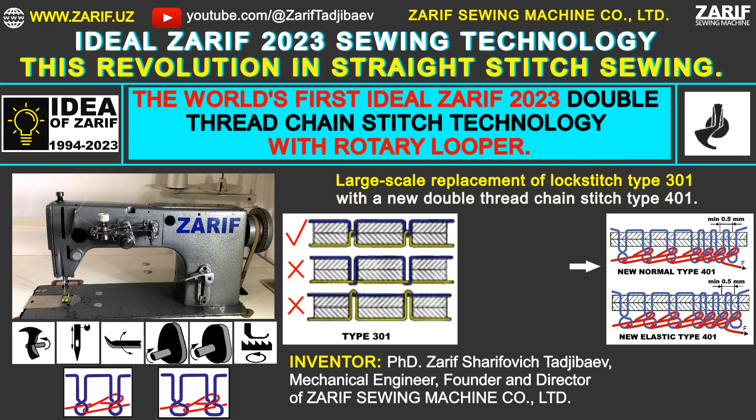We modified an industrial lockstitch sewing machine, Class 1022, Orsha, Belarus, to carry out our initial trials. Through extensive testing, we identified areas for improvement and gradually improved the machine by applying our expertise. Finally, in 2023, we successfully created the world's first Ideal Zarif technology for straight stitch sewing.

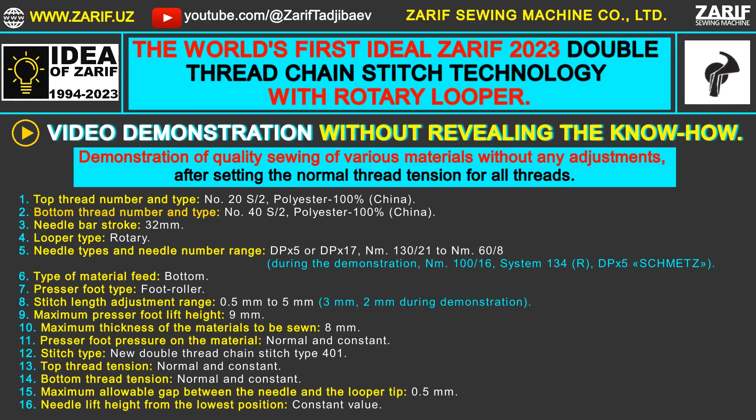Our prototype of the innovative Zarif double thread chain stitch sewing machine works on the basis of our Ideal Zarif 2023 year double thread chain stitch technology with a rotary looper.

For the sewing demonstration, we will be using sewing threads made in China. The main requirement is the absence of knots, as knots disrupt the stitch formation process as they cannot pass through the eye of the needle.

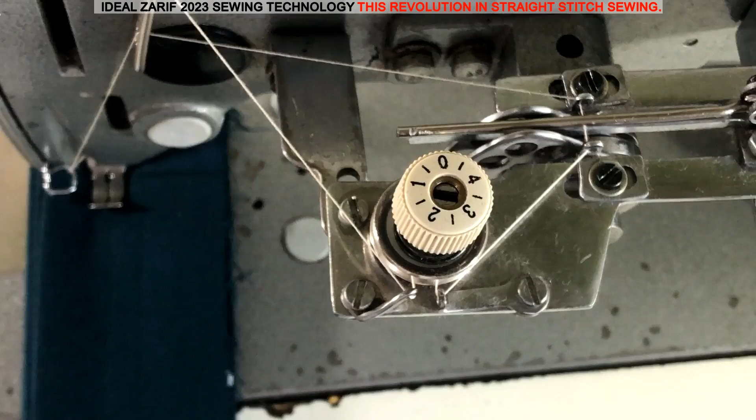During sewing, the top thread tensioner nut and the bottom thread tensioner nut, not shown, remain in a fixed position, ensuring the normal thread tension, neither too loose nor too tight.

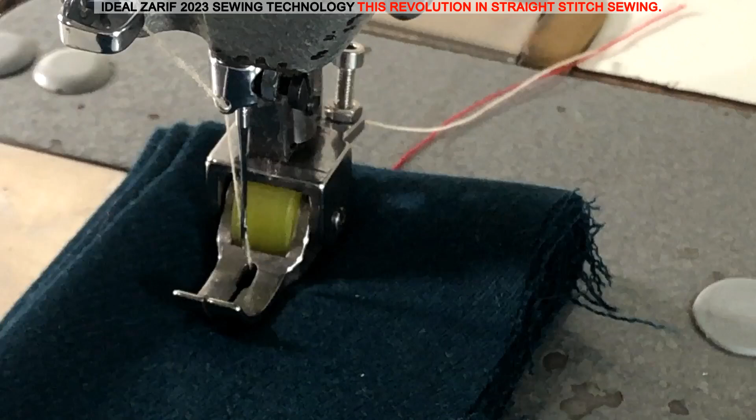In our Ideal Zarif 2023 sewing technology, the needle is not involved in pre-tightening the top thread loop from the previous stitch. As a result, for the first time ever, a double thread chain stitch sewing machine uses a needle with one long groove.

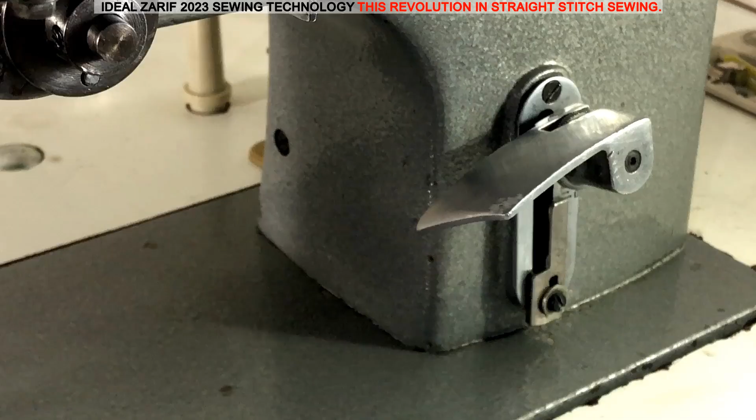This design offers greater resistance to bending compared to the double groove needle used in existing double thread and multi-thread chain stitch technologies. Thanks to our Ideal Zarif 2023 sewing technology, it has become possible for the first time in the world to reduce the length of the double thread chain stitch to 0.5 mm, allowing for more secure tacking of the seam end and preventing unraveling due to condensed stitches.

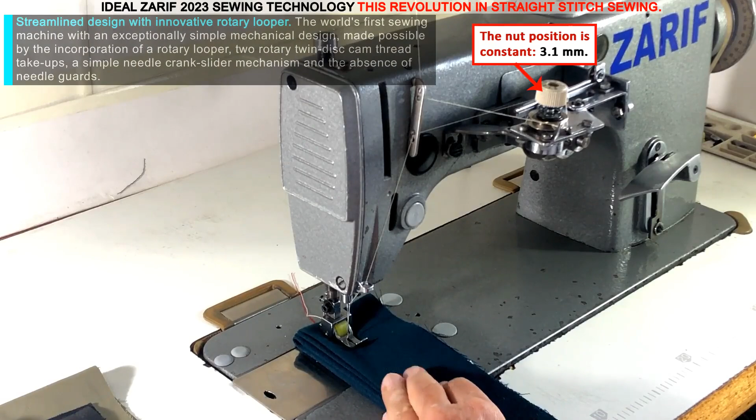Streamlined design with innovative rotary looper: the world's first sewing machine with an exceptionally simple mechanical design, made possible by the incorporation of a rotary looper, two rotary twin-disc cam thread take-ups, a simple needle crank slider mechanism, and the absence of needle guards.

Revolutionary chain stitch look: this pioneering double-thread chain stitch sewing machine produces a new double-thread chain stitch type 401, in which the loops of the top and bottom threads are rotated 180 degrees. This innovative design makes the underside of the chain stitch look like a thick thread running along the seam, rather than a chain of threads, due to the use of a rotary looper.

One long groove needle for maximum strength. For the first time, a double thread chain stitch sewing machine uses a needle with one long groove to produce a double thread chain stitch type 401, which offers greater flexural strength than a needle with two long grooves used in existing double thread and multi-thread chain stitch technologies.

Easily sew combinations of different materials. The world's first double-thread chain stitch sewing machine that can sew combinations of different materials such as textile-leather, textile-plastic, and textile-plastic zippers without changing the normal tension of the threads, thanks to our know-how.

Secure tacking of the chain stitch seam end. The world's first double-thread chain stitch sewing machine, thanks to our know-how, makes it possible to reduce the length of the chain stitch to 0.5 mm, thus making the end of the seam more secure against unraveling by condensing the stitches at a stitch length of 0.5 mm.

Thanks to our Ideal Zarif 2023 sewing technology, it has become possible for the first time in the world to reduce the length of the double thread chain stitch to 0.5 mm. This allows for a more secure tacking of the chain stitch seam end and prevents unraveling due to condensed stitches at a stitch length of 0.5 mm.

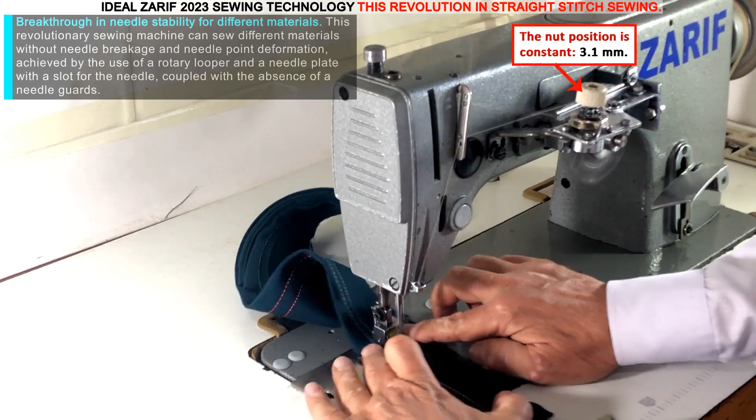Breakthrough in needle stability for different materials. This revolutionary sewing machine can sew different materials without needle breakage and needle point deformation, achieved by the use of a rotary looper and a needle plate with a slot for the needle, coupled with the absence of needle guards.

Elimination of skipped stitches and unraveling. This pioneering sewing machine, thanks to our innovative design, can sew materials without a single skipped stitch, which is critical for chain stitch seams, as all types of chain stitch seams are prone to unraveling, both at the end of the seam if not securely tacked, and from a skipped stitch back to the beginning of the seam.

No thread breaks. The first sewing machine capable of sewing through materials without thread breaks when low-strength threads and threads with knots are not used, thanks to the smooth tightening of the top and bottom threads with two rotary twin-disc cam thread take-ups and our know-how.

The end of the chain stitch seam is securely tacked. High-quality chain stitch seams with no adjustments. For the first time in the world, we've used our know-how to achieve high-quality chain stitch seams without skipped stitches. All stitches are ideally tightened, regardless of the thickness, stiffness or density of the material, simply by setting the normal thread tension for all threads, with no further adjustments required.

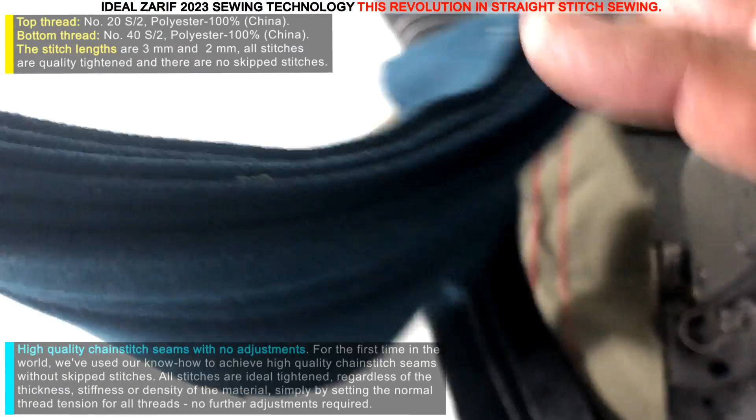A new look for the chain stitch underside. For the first time ever, the underside of a chain stitch seam looks like a thick thread running along the seam instead of a chain. This breakthrough is made possible by our new double thread chain stitch type 401, where the top thread and bottom thread loops are rotated 180 degrees.

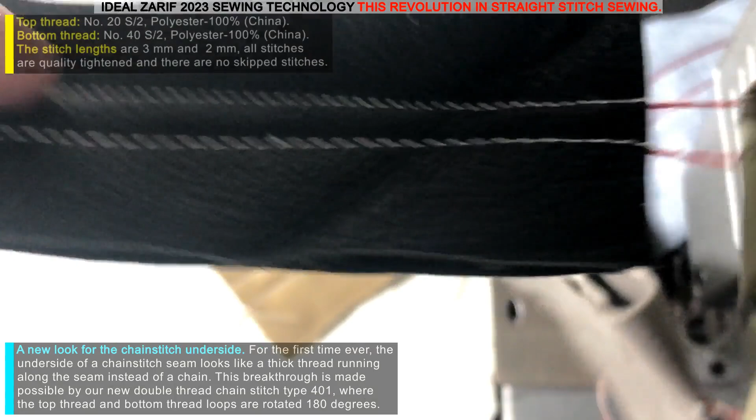Introducing the new double thread chain stitch type 401. The new double thread chain stitch type 401 produced by Zarif sewing machine can completely replace the traditional double thread chain stitch type 401, and can also replace the lockstitch type 301 on a large scale.

Quality joining of different materials without adjustments. For the first time, our advanced technology allows quality joining of materials of different thicknesses, densities, and stiffnesses with chain stitch, without any adjustments during the sewing process, simply by setting the normal thread tension for all threads, thanks to our know-how.

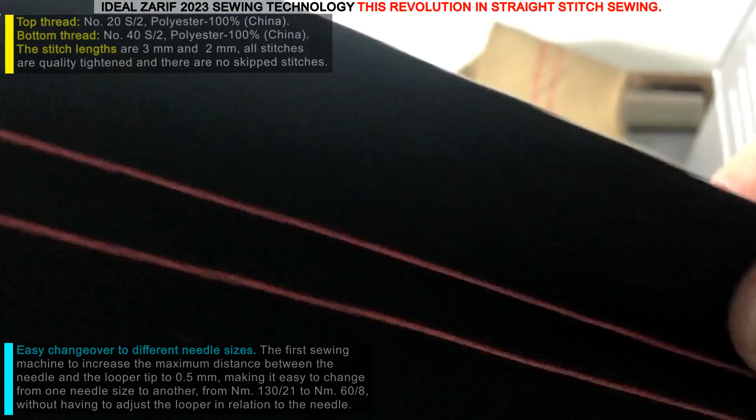Easy changeover to different needle sizes. The first sewing machine to increase the maximum distance between the needle and the looper tip to 0.5 mm, making it easy to change from one needle size to another, from number 130 to number 60, without having to adjust the looper in relation to the needle.

Efficient sewing of mixed material combinations. Our advanced technology enables high-quality stitching of material combinations such as textile-leather, textile-plastic, and textile-plastic zippers without the need to adjust the normal tension of the threads, thanks to the use of our know-how.

Secure tacking of the chain stitch seam end. The world's first double thread chain stitch sewing machine, thanks to our know-how, makes it possible to reduce the length of the chain stitch to 0.5 mm, thus making the end of the chain stitch seam more secure against unraveling by condensing the stitches with a stitch length of 0.5 mm.

For the first time, materials can be joined tightly with chain stitch. The world's first double thread chain stitch sewing machine, thanks to the application of our know-how, is able to lock the top thread loop tightly in the stitch without changing the normal thread tension, resulting in a normal stitch that ensures a tight joining of materials for the first time in the world.

Increased wear resistance of the chain stitch seam. Thanks to our know-how, the ability to lock the top thread loop tightly in the stitch not only makes it possible for the first time to join materials tightly with a double thread chain stitch, but also presses the stitch threads tightly against the surfaces of the materials being sewn, thus increasing the wear resistance of the chain stitch seam.

Tightly joined materials made easy. Thanks to our know-how, it's now possible to join different materials tightly with chain stitch seams without having to adjust the normal thread tension. This is a revolution in sewing.

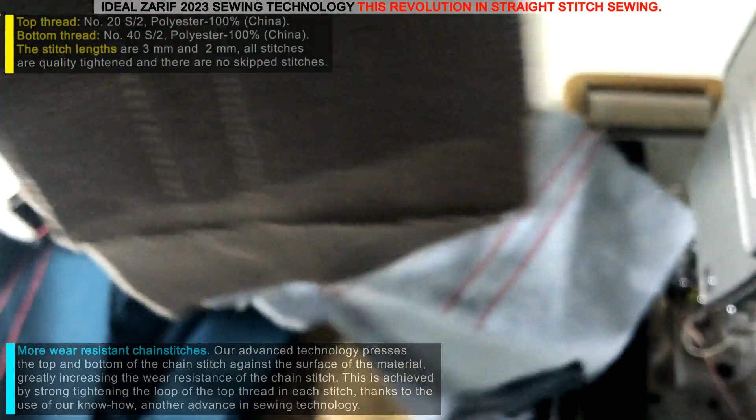More wear-resistant chain stitches. Our advanced technology presses the top and bottom of the chain stitch against the surface of the material, greatly increasing the wear resistance of the chain stitch. This is achieved by strongly tightening the loop of the top thread in each stitch, thanks to the use of our know-how, another advance in sewing technology.

For the first time, materials can be joined tightly with chain stitch. The world's first double-thread chain stitch sewing machine, thanks to the application of our know-how, is able to lock the top thread loop tightly in the stitch without changing the normal thread tension, resulting in a normal stitch that ensures a tight joining of materials for the first time in the world.

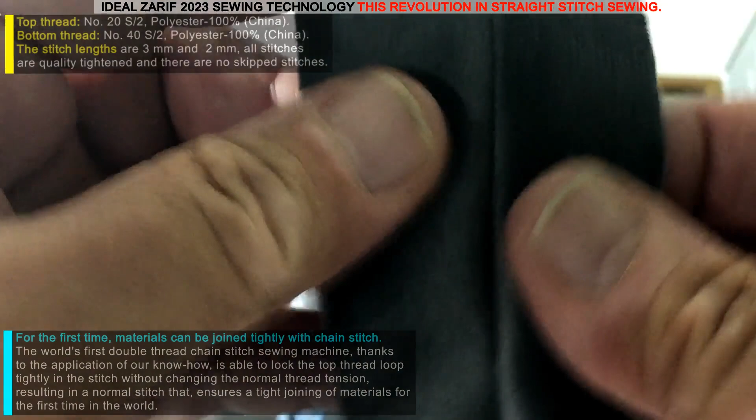Loosely tightening the top thread loop in a stitch to produce an elastic stitch. The world's first double-thread chain stitch sewing machine, using our know-how, can loosely tighten the top thread loop in a stitch without changing the normal thread tension. The result is an elastic stitch that makes it possible for the first time to produce exceptionally smooth seams on lightweight materials and elastic seams on stretch materials.

Efficient sewing of mixed material combinations. Our advanced technology enables high-quality stitching of material combinations such as textile-leather, textile-plastic, and textile-plastic zippers without the need to adjust the normal tension of the threads, thanks to the use of our know-how.

Tightly joined materials made easy. Thanks to our know-how, it's now possible to join different materials tightly with chain stitch seams without having to adjust the normal thread tension. This is a revolution in sewing.

There is not a single skipped stitch and all the stitches are very well tightened. Our innovative prototype Zarif sewing machine has made it possible for the first time to sew materials up to 8 mm thick with a short needle bar stroke of 32 mm, thanks to the use of our know-how, making the machine universal for a wide range of materials.

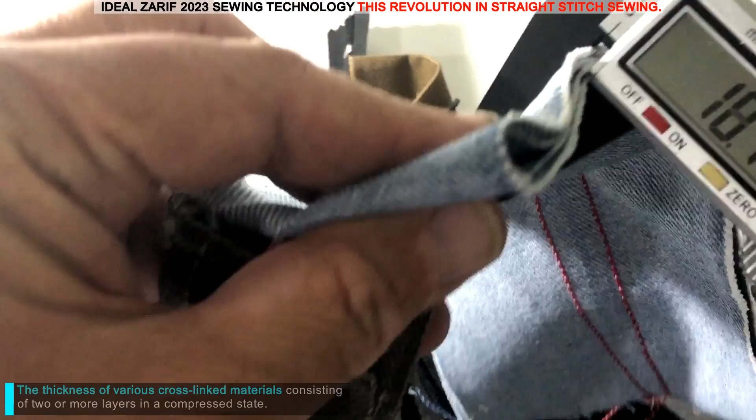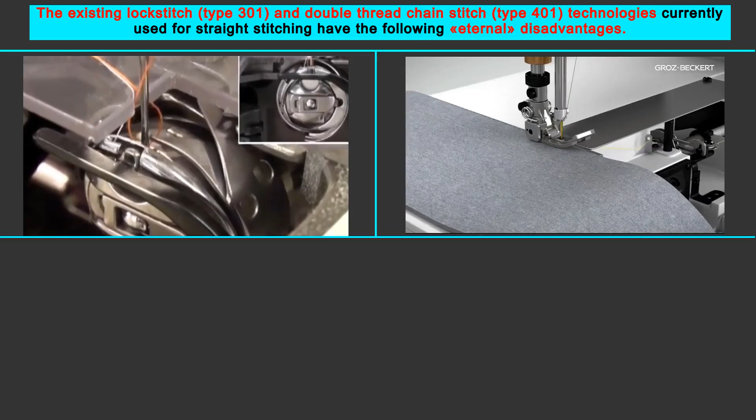The existing lock stitch Type 301 and double thread chain stitch Type 401 technologies currently used for straight stitching have the following eternal disadvantages, common to both existing sewing technologies.

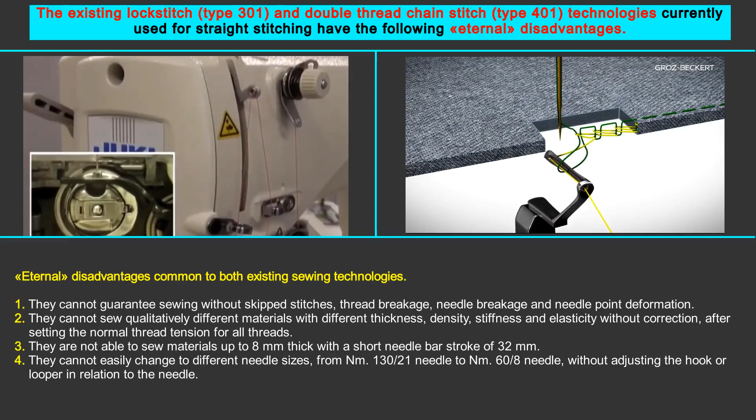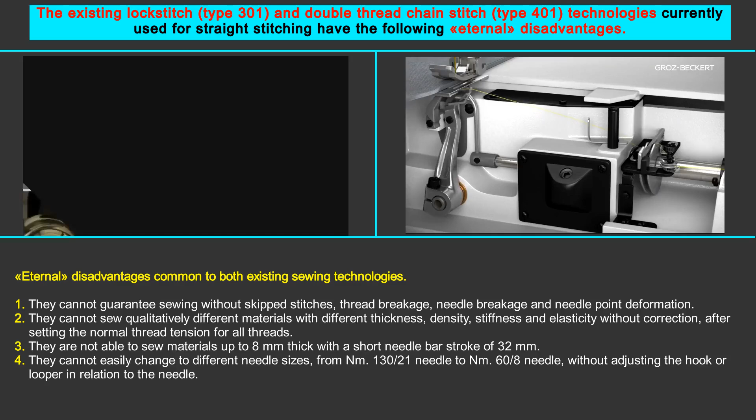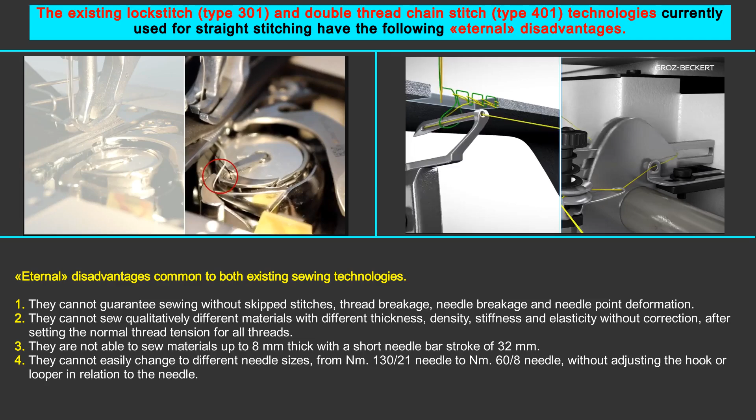They cannot guarantee sewing without skipped stitches, thread breakage, needle breakage, and needle point deformation. They cannot sew qualitatively different materials with different thickness, density, stiffness, and elasticity without correction after setting the normal thread tension for all threads. They are not able to sew materials up to 8 mm thick with a short needle bar stroke of 32 mm. They cannot easily change to different needle sizes, from number 130 needle to number 60 needle, without adjusting the hook or looper in relation to the needle.

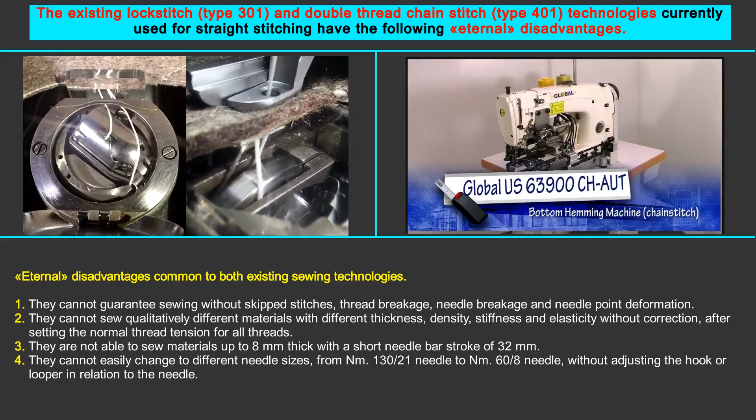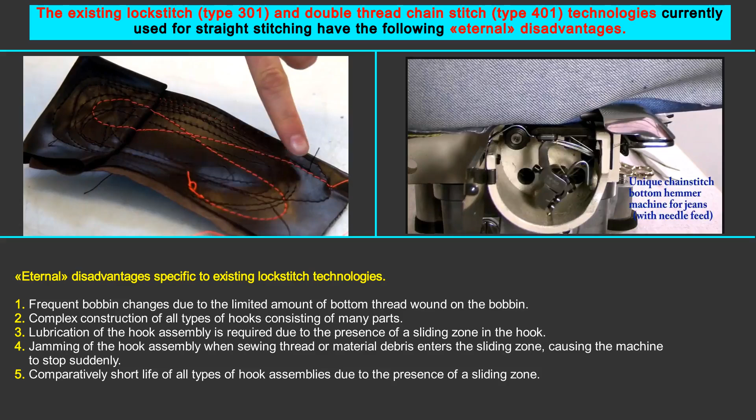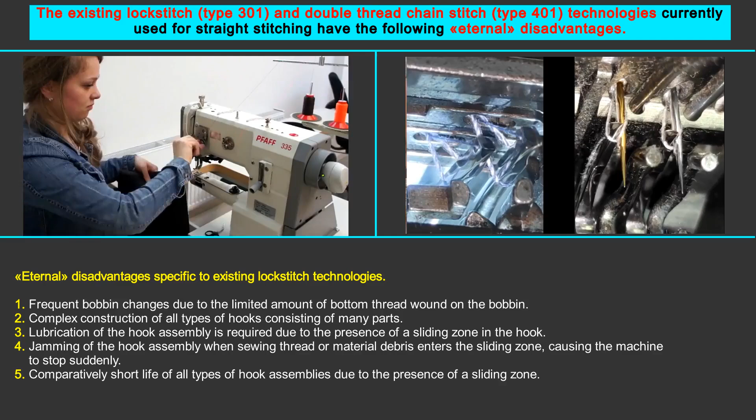Eternal disadvantages specific to existing lockstitch technologies: frequent bobbin changes due to the limited amount of bottom thread wound on the bobbin; complex construction of all types of hooks consisting of many parts; lubrication of the hook assembly is required due to the presence of a sliding zone in the hook; jamming of the hook assembly when sewing thread or material debris enters the sliding zone, causing the machine to stop suddenly; and comparatively short life of all types of hook assemblies due to the presence of a sliding zone.

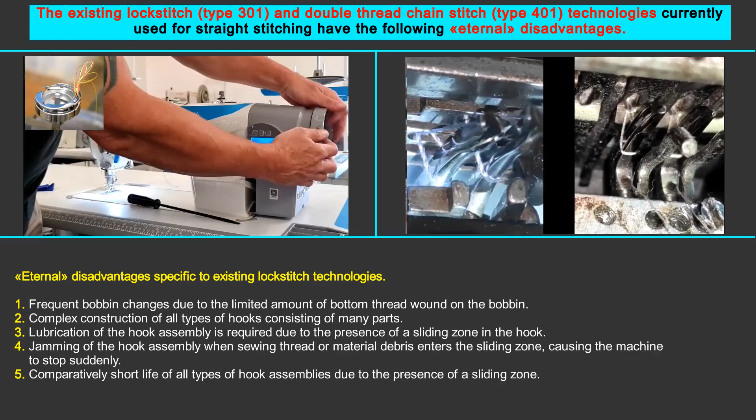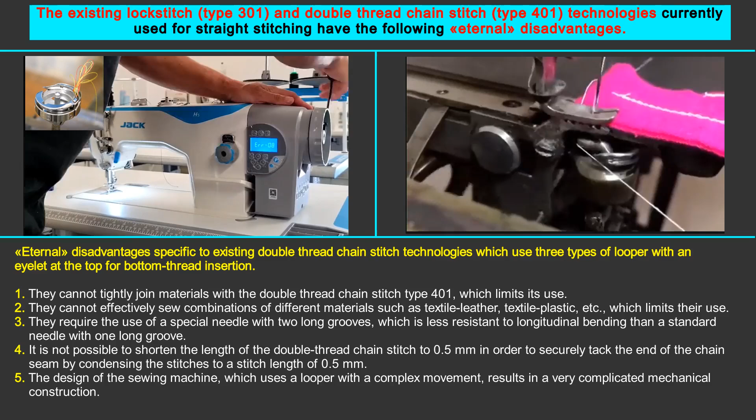Eternal disadvantages specific to existing double thread chain stitch technologies, which use 3 types of looper with an eyelet at the top for bottom thread insertion: they cannot tightly join materials with the double thread chain stitch type 401, which limits its use. They cannot effectively sew combinations of different materials such as textile-leather, textile-plastic, etc., which limits their use. They require the use of a special needle with 2 long grooves, which is less resistant to longitudinal bending than a standard needle with 1 long groove.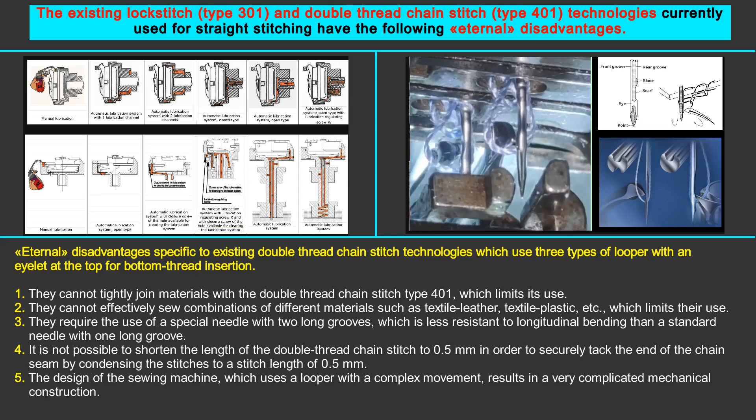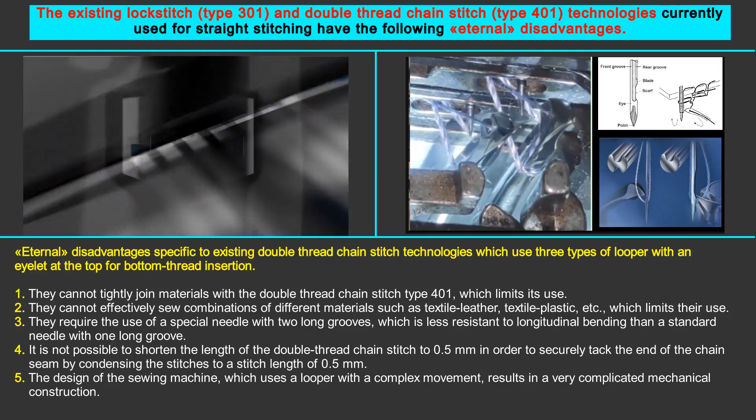It is not possible to shorten the length of the double thread chain stitch to 0.5 mm in order to securely tack the end of the chain seam by condensing the stitches to a stitch length of 0.5 mm. The design of the sewing machine, which uses a looper with a complex movement, results in a very complicated mechanical construction.

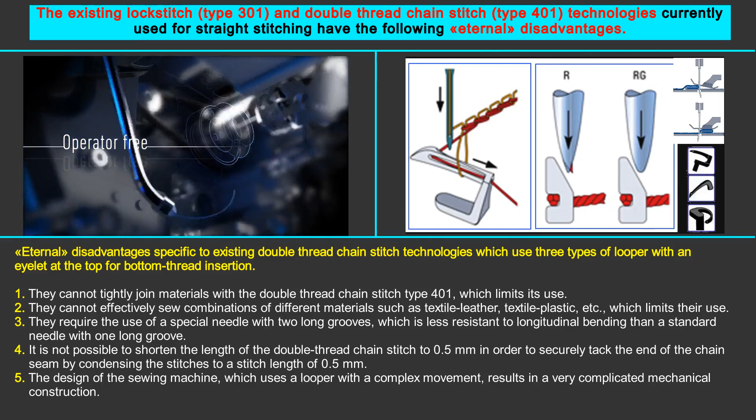Our ideal Zarif 2023 double thread chain stitch technology has revolutionized sewing machine design and straight stitch sewing. For the first time, a rotary looper is used to form a double thread chain stitch, resulting in the world's first new double thread chain stitch type 401, where the top and bottom thread loops are rotated 180 degrees.

For the first time, an ordinary needle with a single long groove is used to form a double thread chain stitch, as the needle does not participate in the pre-tightening of the top thread loop placed in the previous stitch. For the first time, materials up to 8 mm thick can be sewn with a needle bar stroke of 32 mm.

For the first time, it is possible to sew materials of different thickness, density, stiffness, and elasticity without any adjustments, by setting the normal tension for all threads. For the first time, it is possible to sew without skipped stitches, thread breakage, and needle point deformation, provided the thread is free of knots and the needle size matches the material being sewn.

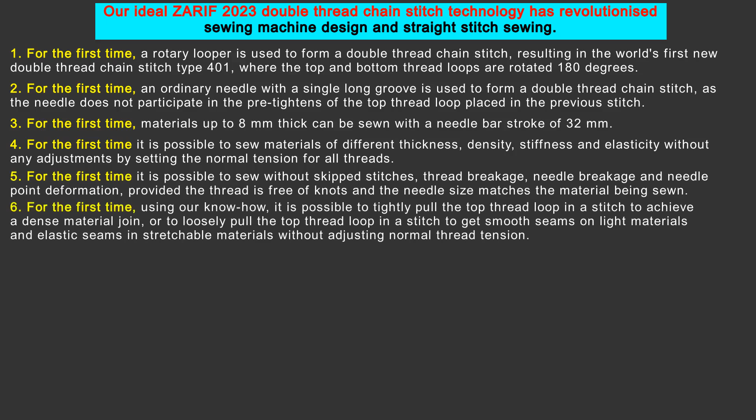For the first time, using our know-how, it is possible to tightly pull the top thread loop in a stitch to achieve a dense material join, or to loosely pull the top thread loop in a stitch to get smooth seams on light materials and elastic seams in stretchable materials, without adjusting normal thread tension.

For the first time, the maximum allowable gap between the needle and the tip of the looper has been increased to 0.5 mm, allowing an easy transition from a number 130 needle to a number 60 needle without adjusting the looper relative to the needle. For the first time, high stitch formation reliability has been achieved without the use of needle guards.

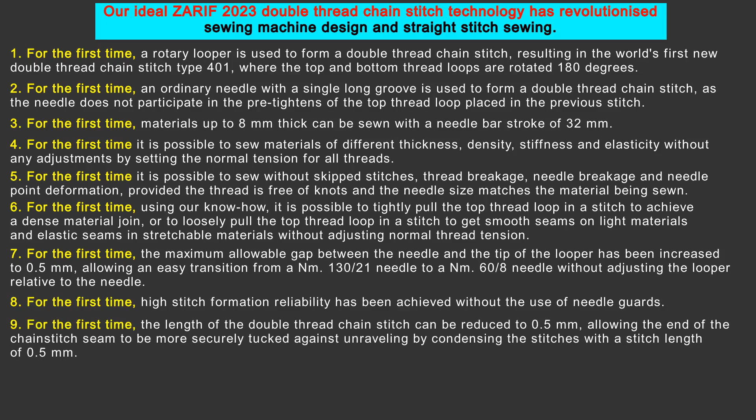For the first time, the length of the double thread chain stitch can be reduced to 0.5 mm, allowing the end of the chain stitch seam to be more securely tucked against unraveling by condensing the stitches with a stitch length of 0.5 mm. For the first time, it is possible to develop different types of sewing machines, with different types of platforms and different types of material feed, with a very simple mechanical design that operates with high reliability and long service life.

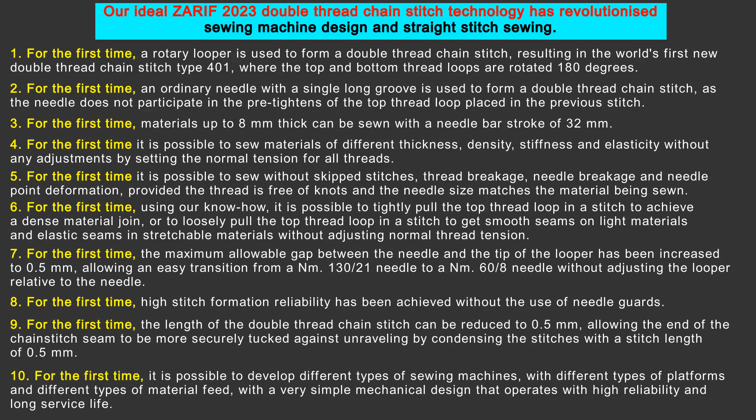History of Zarif double thread chain stitch technology with rotary looper: in 1994 we came up with the idea of creating a double thread chain stitch type 401 using a rotary looper. We applied for a patent for this new Zarif double thread chain stitch technology, and in 2000, US patent number 6095069 was granted.

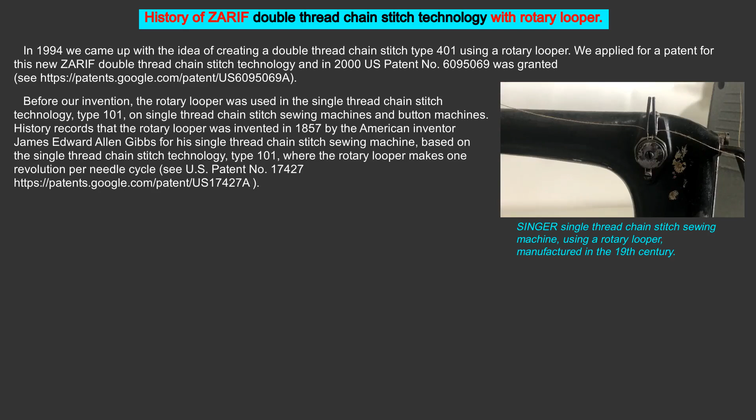Before our invention, the rotary looper was used in the single thread chain stitch technology, type 101, on single thread chain stitch sewing machines and button machines. History records that the rotary looper was invented in 1857 by American inventor James Edward Allen Gibbs for his single thread chain stitch sewing machine, based on the single thread chain stitch technology type 101, where the rotary looper makes 1 revolution per needle cycle. See US patent number 17427.

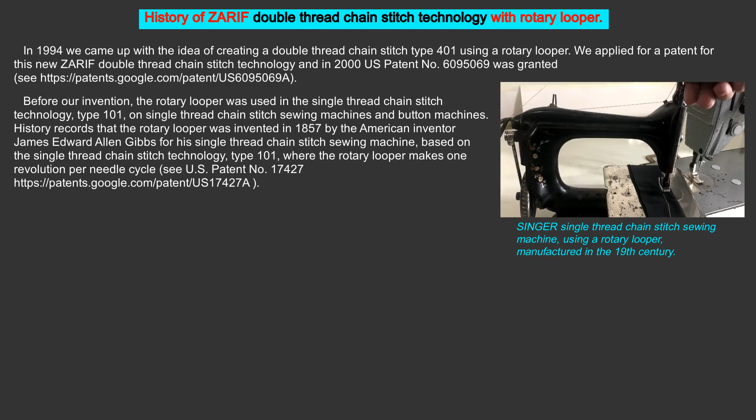A rotary looper is a unique and the only tool in sewing technology that can rotate loops of thread around its body by turning them 180 degrees with its tail. As is known, the rotary looper is made in one piece and has three zones: the head zone with a front tip to catch the thread and a rear tip to release the thread loop from the body of the looper, the tail zone for rotating the thread loop through 180 degrees, and the shaft zone for attaching the looper to the machine.

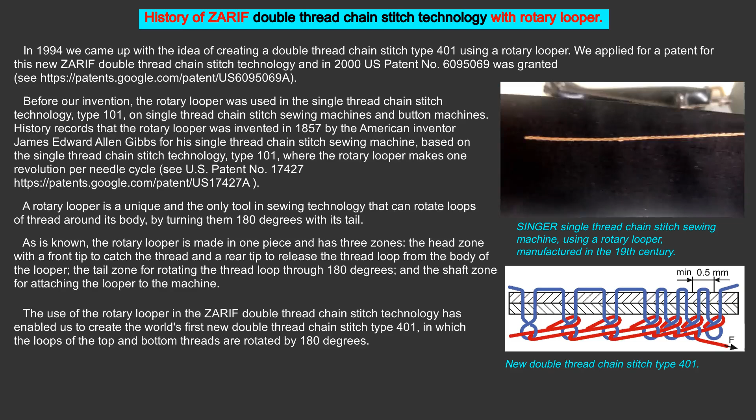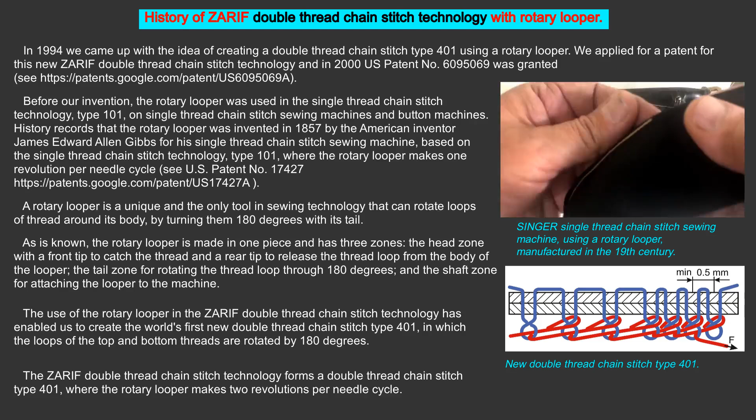The use of the rotary looper in the Zarif double thread chain stitch technology has enabled us to create the world's first new double thread chain stitch type 401, in which the loops of the top and bottom threads are rotated by 180 degrees. The Zarif double thread chain stitch technology forms a double thread chain stitch type 401, where the rotary looper makes 2 revolutions per needle cycle. Zarif double thread chain stitch technology with rotary looper, invented by us in 1994, see US patent number 6095069.

In the Zarif double thread chain stitch technology, the top thread is fed to the looper by a needle with a vertical reciprocating motion, as is usually done. To feed the bottom thread to the looper, a bottom thread pusher is used, which makes oscillating movements in the horizontal plane. Since the rotary looper can loop thread around its body in the form of a loop...

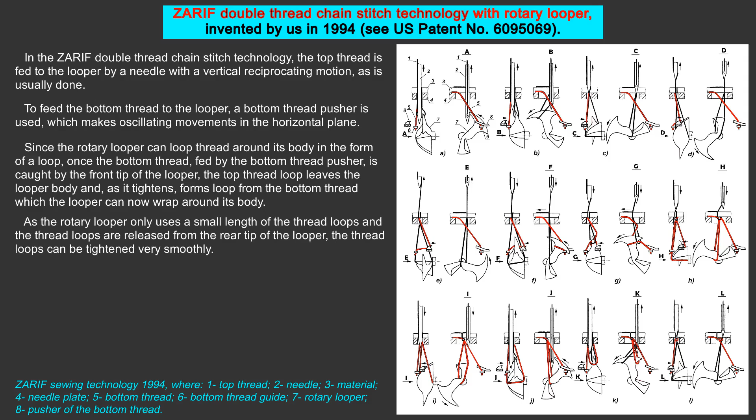Once the bottom thread, fed by the bottom thread pusher, is caught by the front tip of the looper, the top thread loop leaves the looper body and, as it tightens, forms a loop from the bottom thread which the looper can now wrap around its body. As the rotary looper only uses a small length of the thread loops and the thread loops are released from the rear tip of the looper, the thread loops can be tightened very smoothly. Therefore, the Zarif double thread chain stitch technology uses 2 rotary twin disc cam thread take-ups to feed and tighten both the top and bottom threads, with each thread being controlled separately.

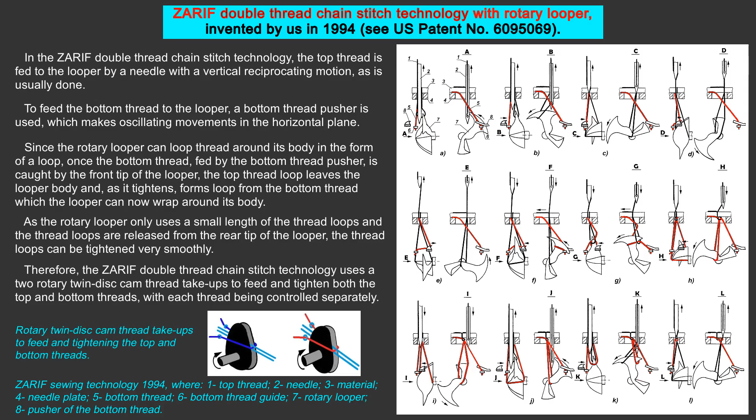History of the prototype development of the Zarif sewing machine based on Zarif double thread chain stitch technology with a rotary looper. In 1997, we decided to build a prototype sewing machine to test our new Zarif double thread chain stitch technology with a rotary looper, which we had invented in 1994. We chose a Class 1022 lockstitch industrial sewing machine from the Belarusian company Orsha because it was widely used in Uzbekistan at the time and was relatively affordable. The machine had a needle bar stroke of 32 mm and was designed to sew fabrics of medium thickness.

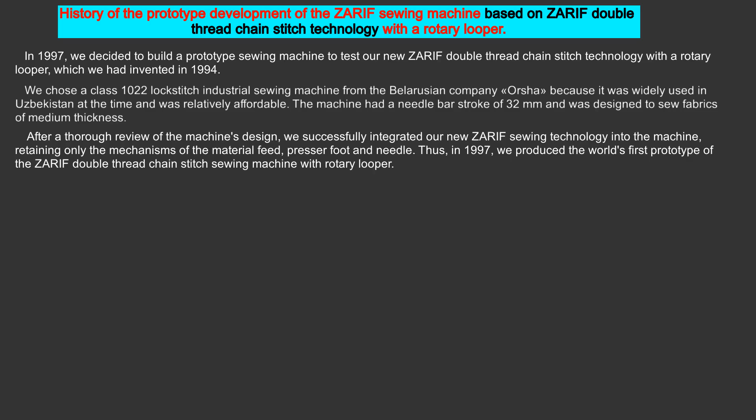After a thorough review of the machine's design, we successfully integrated our new Zarif sewing technology into the machine, retaining only the mechanisms of the material feed, presser foot, and needle. Thus, in 1997, we produced the world's first prototype of the Zarif double thread chain stitch sewing machine with rotary looper. Trials on the prototype Zarif sewing machine allowed us to identify some of the shortcomings of our new Zarif double thread chain stitch technology developed in 1994.

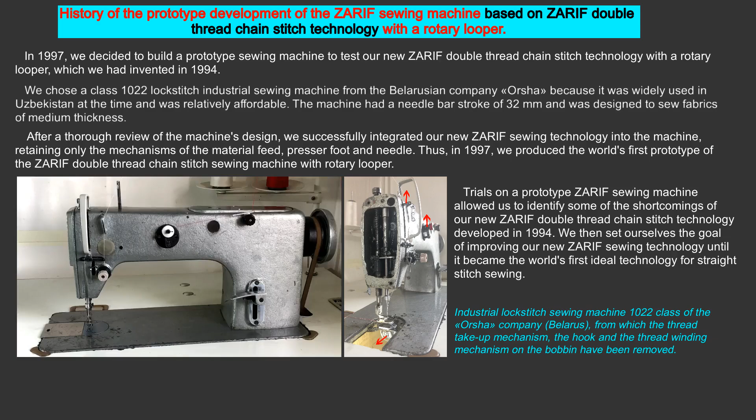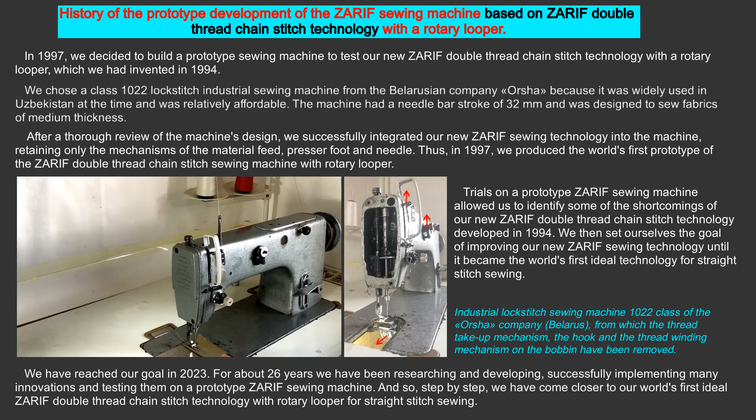We then set ourselves the goal of improving our new Zarif sewing technology until it became the world's first ideal technology for straight stitch sewing. We have reached our goal in 2023. For about 26 years we have been researching and developing, successfully implementing many innovations and testing them on a prototype Zarif sewing machine. And so, step by step, we have come closer to the world's first ideal Zarif double thread chain stitch technology with rotary looper for straight stitch sewing.

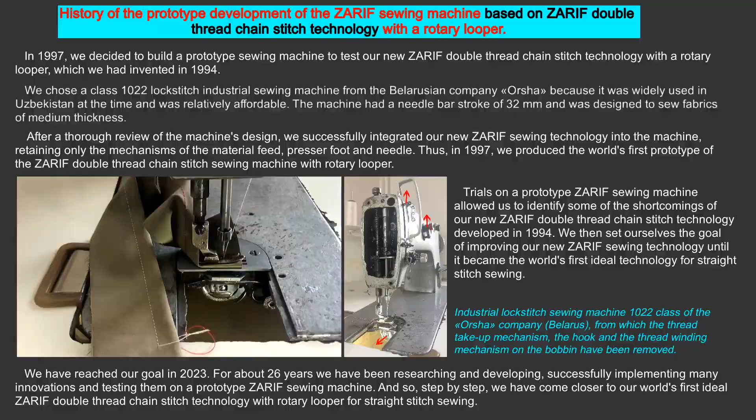Stitch type, working units, and technical specifications of the prototype Zarif sewing machine based on the ideal Zarif 2023 double thread chain stitch technology with rotary looper.

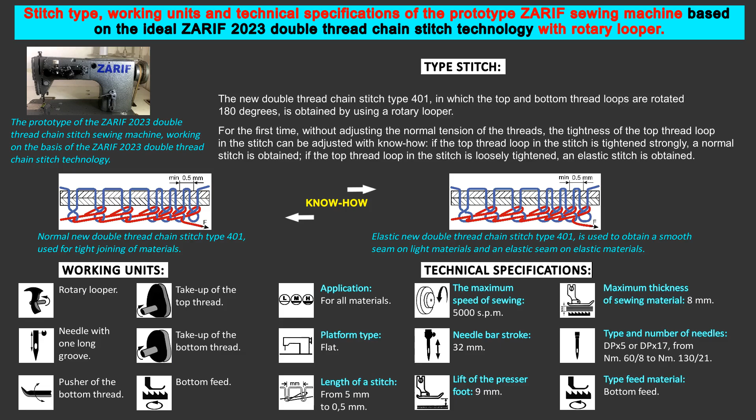The world's first prototype of the Zarif 2023 double thread chain stitch sewing machine has an extremely simple mechanical design and forms stitches with high reliability and durability. The use of 3 rotary working units in the machine, such as the rotary looper and 2 rotary thread take-ups, together with a simple crank slider mechanism for the needle and the absence of needle guards, has made it possible to create the world's first prototype of the Zarif sewing machine with a very simple mechanical design.

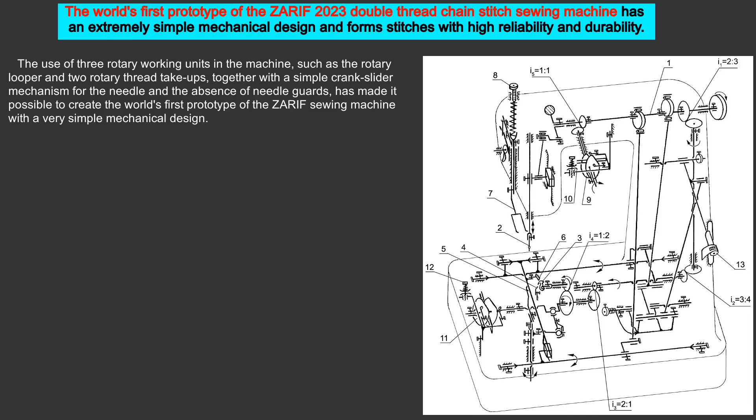In addition, the machine is the first in the world to allow easy switching between different needle sizes, from needle number 130 to needle number 60, without having to adjust the position of the looper relative to the needle, thanks to the world's first increase of the maximum allowable gap between the needle and the looper tip to 0.5 millimeters.

In addition, the machine is very easy to maintain as all working units are mounted on the ends of the shafts and can be removed without dismantling other parts of the machine.

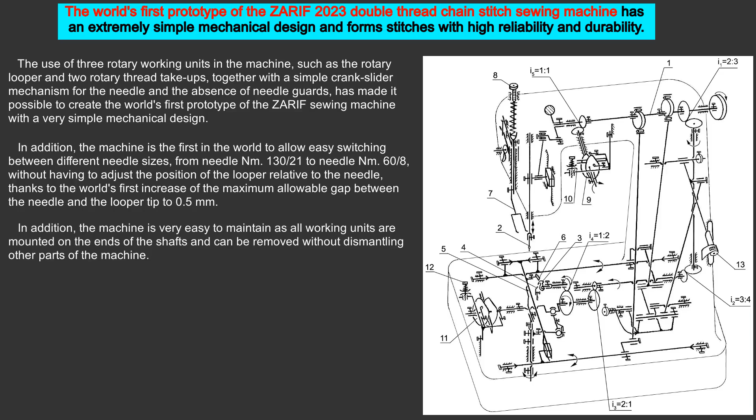Kinematic diagram of the prototype Zarif 2023 double thread chain stitch sewing machine.

Our automatic thread trimming technology for the Zarif double thread chain stitch technology with rotary looper. It is well known that most modern industrial sewing machines are equipped with automatic thread trimming, and all automated sewing systems require automatic thread trimming.

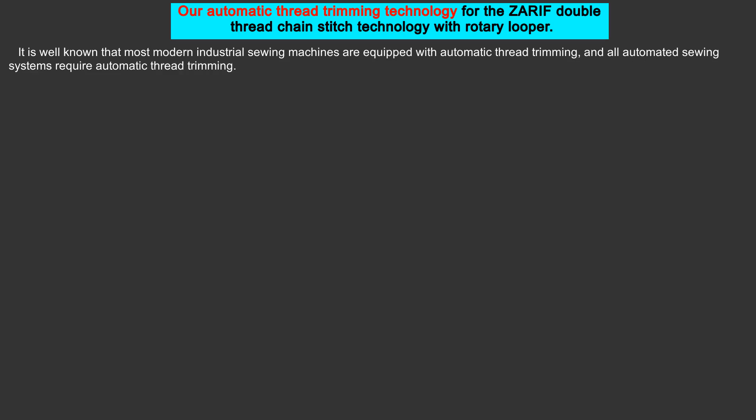With this in mind, we have long been researching and developing automatic thread trimming technology for our Zarif double thread chain stitch technology with rotary looper. Thanks to these efforts, we successfully invented the automatic thread trimming technology in 2020, and further improved it in 2021 and 2023.

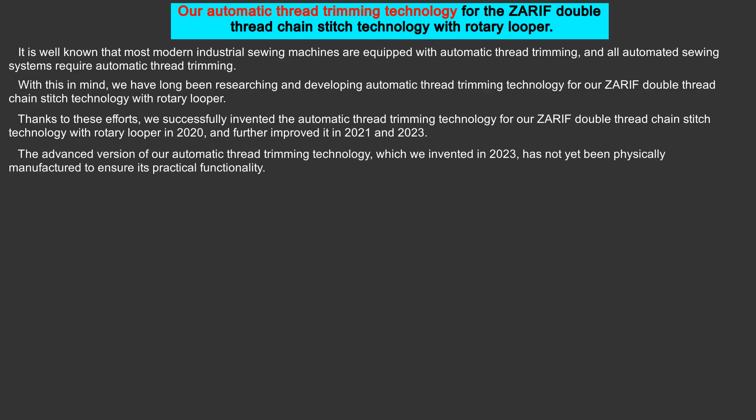The advanced version of our automatic thread trimming technology, which we invented in 2023, has not yet been physically manufactured to ensure its practical functionality. However, the drawings of our automatic thread trimming technology prove that it works in theory. At present we cannot disclose the details of our automatic thread trimming technology as it is not yet patented.

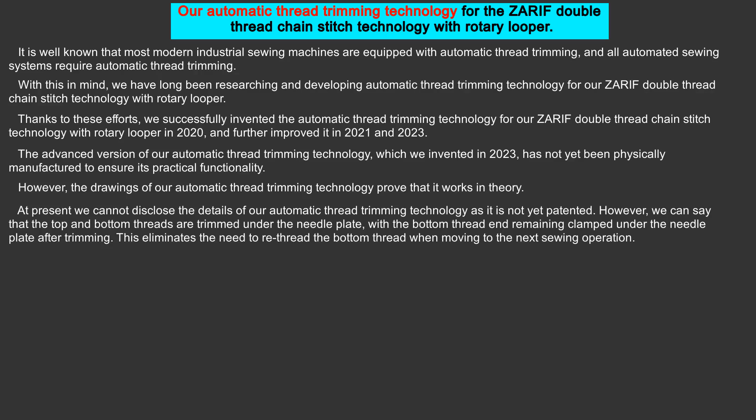However, we can say that the top and bottom threads are trimmed under the needle plate, with the bottom thread end remaining clamped under the needle plate after trimming. This eliminates the need to rethread the bottom thread when moving to the next sewing operation.

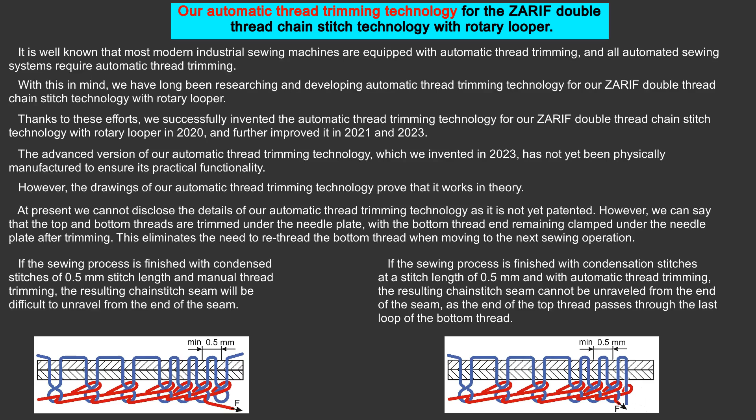If the sewing process is finished with condensed stitches of 0.5 mm stitch length and manual thread trimming, the resulting chain stitch seam will be difficult to unravel from the end of the seam. If the sewing process is finished with condensation stitches at a stitch length of 0.5 mm and with automatic thread trimming, the resulting chain stitch seam cannot be unraveled from the end of the seam, as the end of the top thread passes through the last loop of the bottom thread.

Our ideal Zarif 2023 double thread chain stitch technology with rotary looper opens a new era in the development of automated straight stitch sewing.

It is well known that the future of mass production in various sewing industries is closely linked to automation, and the automation of sewing processes plays an important role in this transformation. Currently, some sewing operations are already being automated using robotic manipulator-controlled sewing systems. In the future, these robotic manipulators may be replaced by more advanced humanoid robots.

When it comes to automated sewing, it is essential that the process is performed to a high standard, ensuring that there are no skipped stitches, thread breakage, needle breakage and deformation of the needle point. Efficient sewing of different materials without the need for adjustments is also critical to the automation of the sewing process.

Our ideal Zarif 2023 double thread chain stitch technology with rotary looper for straight stitch sewing is the perfect solution to meet all these requirements. Our prototype Zarif sewing machine has proven this in practice, but only when the material is fed in one direction.

This allows us to create different automatic sewing systems based on this technology, where the material is fed in a single direction. However, there are many sewing operations where the stitch must follow a complex path. In such cases, stitch formation must be independent of the material feed direction.

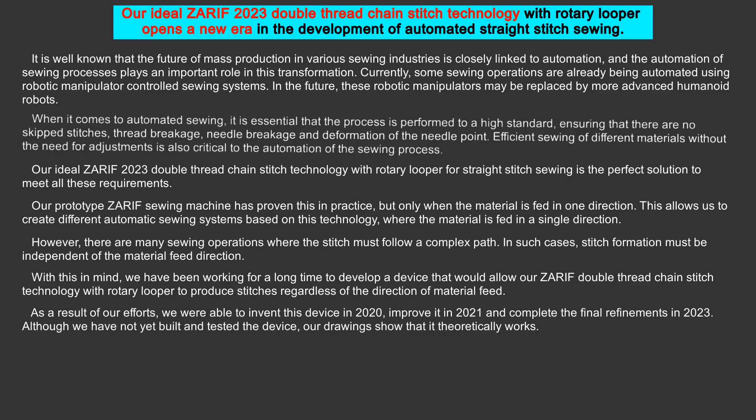With this in mind, we have been working for a long time to develop a device that would allow our Zarif double thread chain stitch technology with rotary looper to produce stitches regardless of the direction of material feed. As a result of our efforts, we were able to invent this device in 2020, improve it in 2021 and complete the final refinements in 2023. Although we have not yet built and tested the device, our drawings show that it theoretically works.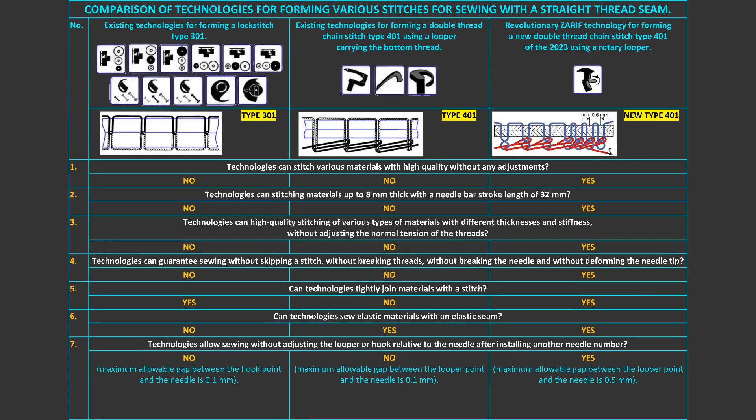Comparison of technologies for forming various stitches for sewing with a straight seam.

Application of the revolutionary ideal Zarif 2023 year double thread chain stitch technology with a rotary looper that forms stitches in only one direction. Our prototype Zarif sewing machine, based on this technology, has proven its ability to perform straight stitching with material feed in only one direction, with a stitch length ranging from 0.5 mm to 5 mm. In addition, we have developed a technical solution that allows the stitch length to be increased to 10 mm.

Based on our ideal Zarif 2023 year double thread chain stitch technology, which forms stitches in only one direction, the following machines can be designed and manufactured: various industrial sewing machines with different types of platforms and material feed mechanisms.

Various automated sewing systems with material feed in one direction only, and a range of programmable automatic pattern sewing machines with a 360 degree rotating head that can feed material in any direction to create complex stitch patterns.

Application of the revolutionary ideal Zarif 2023 year double thread chain stitch technology with a rotary looper, forming stitches in any direction. If the device we invented in 2023, which enables this technology to form stitches with material feed in any direction, works successfully in practice, the following automated machines can be designed and manufactured on the basis of it, enabling the production of complex stitch patterns.

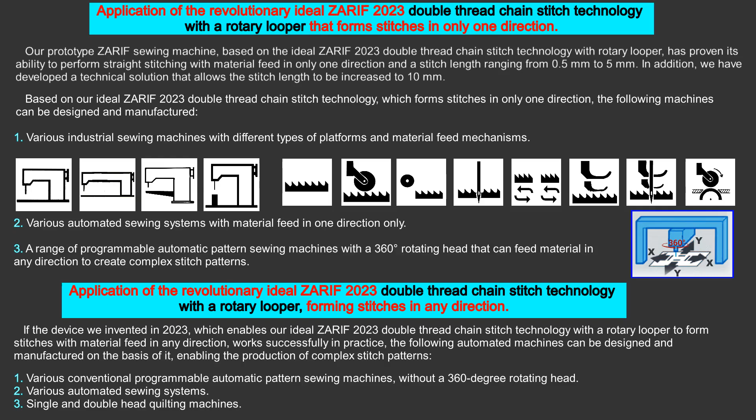Can our revolutionary ideal Zarif 2023 year double thread chain stitch technology with a rotary looper become obsolete in the future? We are confident that this will not happen. Our confidence is based on the following undeniable facts.

The eternal disadvantages of the existing sewing technologies currently used for straight stitch sewing, such as the lockstitch type 301 and the double thread chain stitch type 401, prevent them from becoming the ideal solution for straight stitch sewing, no matter how much they evolve in the future.

Furthermore, the invention of an ideal straight stitch sewing technology can only be achieved by creating a new double thread chain stitch technology that eliminates the eternal disadvantages of existing sewing technologies, since it is technically impossible to invent an ideal straight stitch sewing technology by developing a new lockstitch technology without using a hook.

However, the task of inventing a new double thread chain stitch technology and making it the ideal solution for straight stitch sewing is a very challenging one. All previous attempts to invent a new double thread chain stitch technology and make it the ideal solution for straight stitch sewing were unsuccessful.

For example, the new double thread chain stitch technology using a special hook, see US patent number 3811392 from 1974, was never commercialized. We believe that any new double thread chain stitch technology using a special hook cannot become an ideal solution for sewing due to the complexity of the special hook design and the need for lubrication.

We were the first in the world to invent the new Zarif double thread chain stitch technology with rotary looper in 1994, which was granted US patent number 6095069 in 2000. It took us about 26 years to make this new Zarif sewing technology the world's first ideal straight stitch sewing technology.